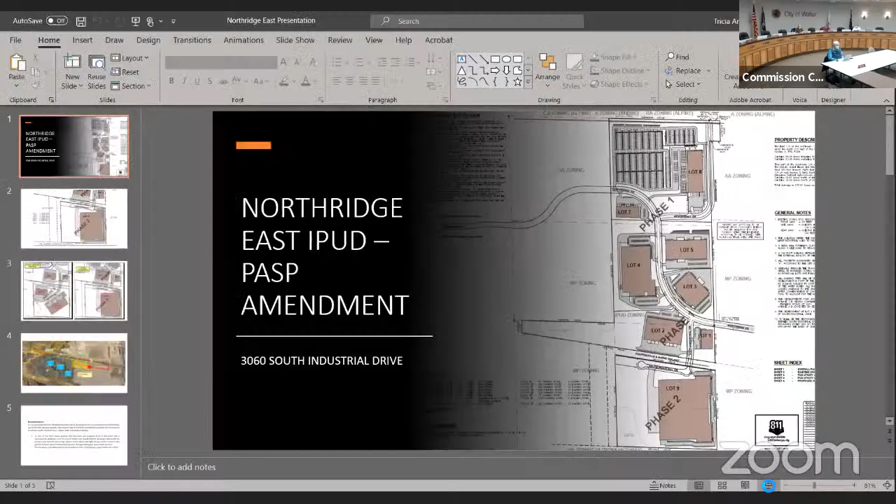So in this graphic here, you can see the whole PUD, and phase 2, as you'll see, is below or south of the railroad tracks.

So another thing they are proposing, on top of combining lots 9 and 10 for one large development, is that they've had interest from a single party who wants all of that acreage for a significant industrial development. Because there's only one occupant proposed for this acreage, it didn't make a ton of sense for them to extend the road all the way to the westernmost border of the parcel.

Because of that, for the time being, staff is in support of building this road in the way that it's been shown. They have to cross the railroad tracks, and there's a bit of work needed with the Coopersville Marne Railway to comply with their standards and MDOT rail safety.

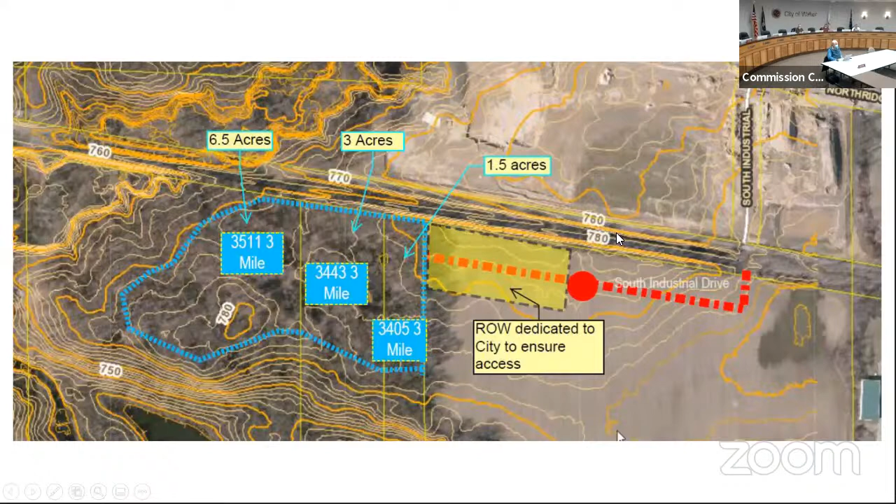I don't want to say this isn't the most desirable approach with a 90-degree bend, but when you look at the development of the site, I think what the city's looking for here, we can find a way to work around that with some safety precautions in terms of clear vision, extra signage, and things like that. So that's really the box check for me tonight, that that's feasible. We think we can work through that.

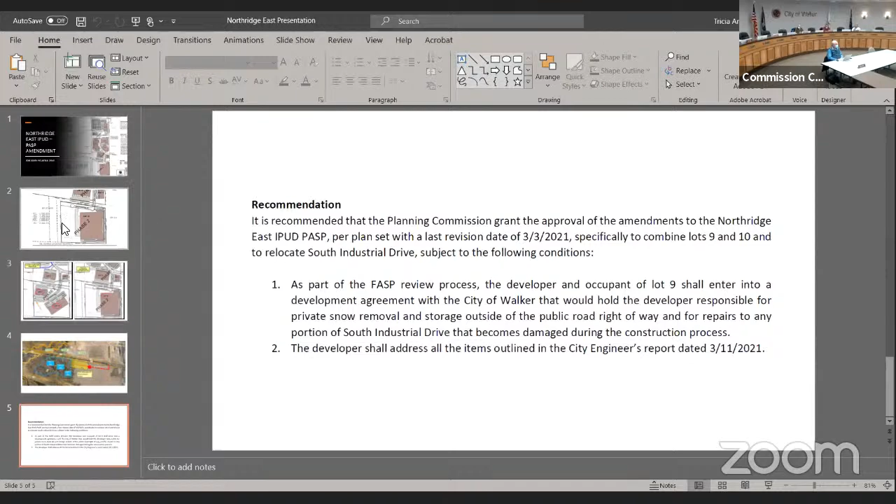We will be working with Tom a little bit as he's working with the railroad, so we'll have a little conflict there, but we'll figure our way through that.

Sanitary sewer and water main: the site south of the tracks will still be served by public sewer and water. There may be a need for that sewer and water to extend all the way to the west property line. We're still working through that with Grand Rapids, but typically they'd want it fully developed when that happens. I think the developer is aware of that, but we have to work through that process.

That's really it, other than one comment: as we try to work with folks and help accelerate some of these projects, we're encouraging them to turn in the detailed road utility plans early on so that we can maybe do some of these things concurrently. If we can get through the reviews and permitting for the road, they can get started a little early and put themselves at an advantage when it comes time to start putting in foundations, walls, and trusses on the building.

We want to do everything we can to minimize the friction between those two sources, so that if a guy's coming in with a load of steel trusses, for example, they're not driving over an under drain or a water main that was just built and doesn't have the necessary cover. So whatever we can do to move this road part along quicker, we want to try and do that.

Okay, thank you, Scott. Any questions for the city engineer?

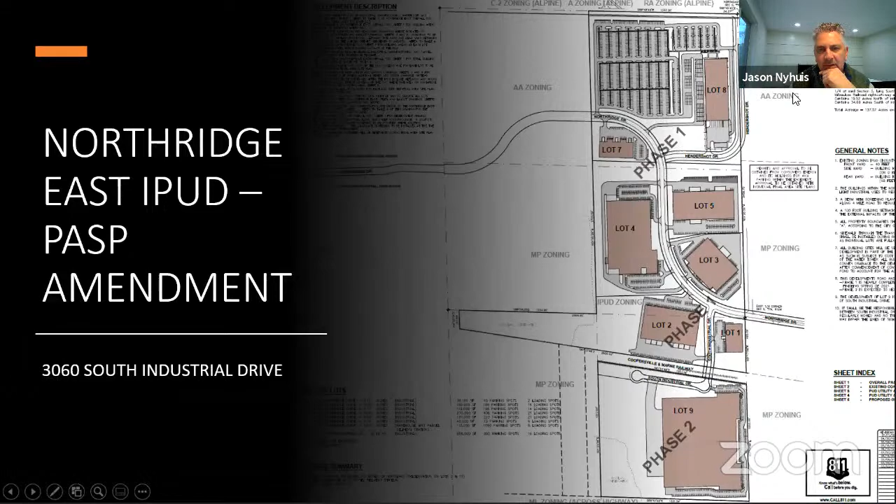Those were both kind of towards Scott. In terms of the dead end, that's probably a reasonable length, especially knowing there are properties to the west that could be served in the future, because we don't want them landlocked. In terms of extending the road to the west property line, I think Frank has some ideas on how to craft that into the development agreement. So we're kind of hands off a little bit on that, since that's something he'll work out with Visser Brothers.

Any other questions? Before we open this up for a public hearing, I'd like to have the developer come forward and offer any comments you may wish to share.

Good evening, I'm Greg Ball with Visser Development. As usual, staff has done a great job explaining what we're trying to accomplish here. When we lay these PUDs out at the very start, we do our best to crystal ball what we think will happen based on our experience in this development field. Ultimately, we have some changes, just like we did with the Amazon site. This too is a little bit of a change, but we were fortunate enough to meet Speedrack Products, the company we're working with. I'll introduce Eric Quist, the president, in a minute.

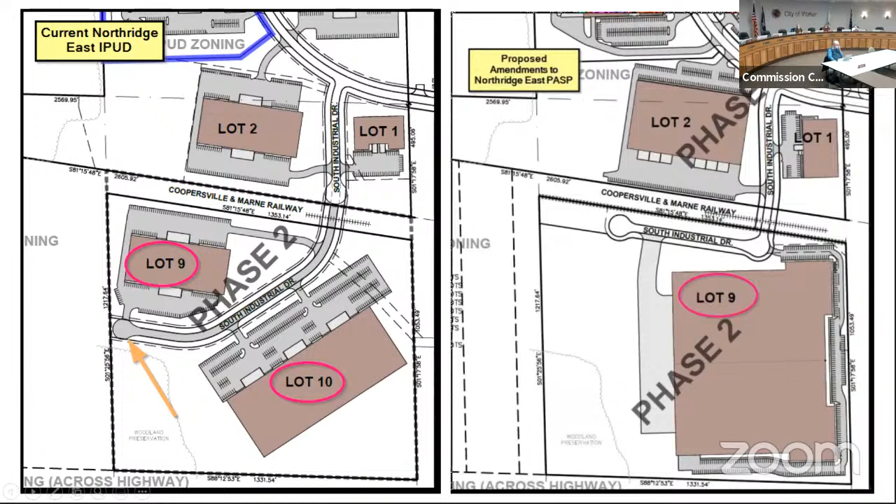So, you know, we're really happy. Thank you for having me on. We're really happy to be here.

We were targeting Northeast Indiana at first, but we decided this is really where we wanted to be. We feel that we can get the workforce we need here, with our owners in the Grand Rapids area, as well as our corporate offices in Sparta. I think most of that is going to move over here. We're still going to have some offices in Sparta, but we are going to put offices in with this facility. Right now we're planning just shy of 300,000 square feet with office and manufacturing.

It'll be high-paying union jobs, hopefully, because it's a right-to-work state. Our current facilities are under contract with the unions - the Millwright unions out of Warren, Michigan. They have a training facility down in Wayland off 131, and that's who will help us recruit people, including robotics people and welding people, and train them and bring them in.

For us, time is of the essence because we already have orders on the books for both Ford and Amazon for 2021 and 2022. So the first phase is to get through about 300,000 square feet, and by 2023, hopefully be breaking ground on another 300,000 square feet for phase 2.

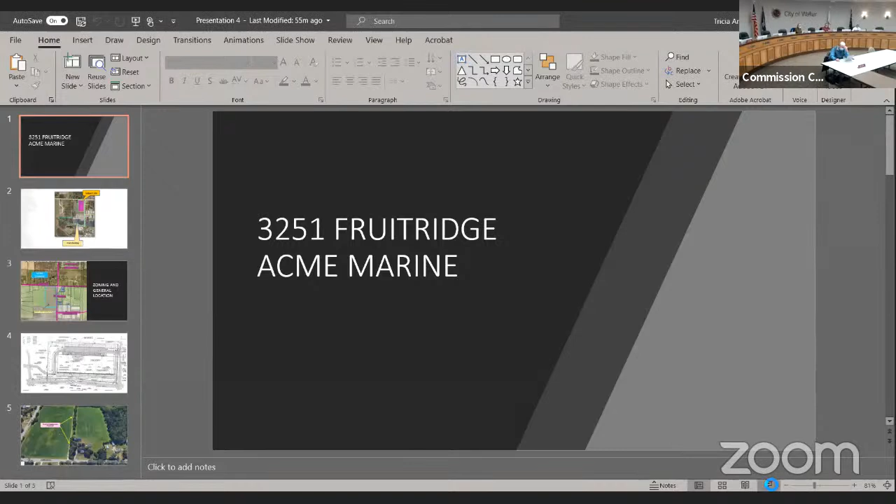Okay, so this project is for a 285,000 square foot multi-tenant industrial building and related site improvements. The planning commission is being asked to grant approval with conditions, or tabling of the request. This is a site plan review located at 3251 Fruitridge Avenue, and this piece of property that is the subject tonight has a future address of 3501 Fruitridge Avenue.

The lot size of the piece that will be split from the parent parcel is 17.65 acres. It has a zoning of light industrial, and the future land use is business and enterprise in the northwest neighborhood cluster. This project is located on the southwest corner of 4 Mile Road and Fruitridge Avenue, just north of the Irwin Seating site. Tonight we have Justin Longstreth of Bruggink, representing the applicant, Honeycrisp Ventures, and the owner, Graham Irwin.

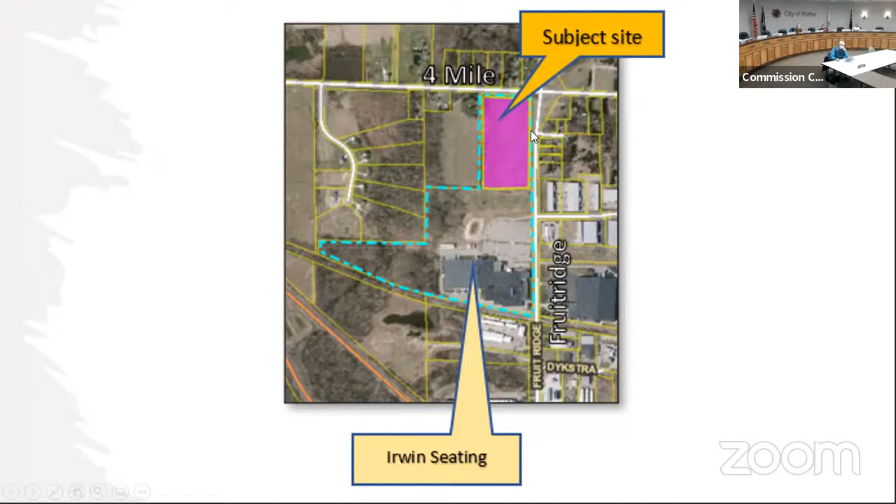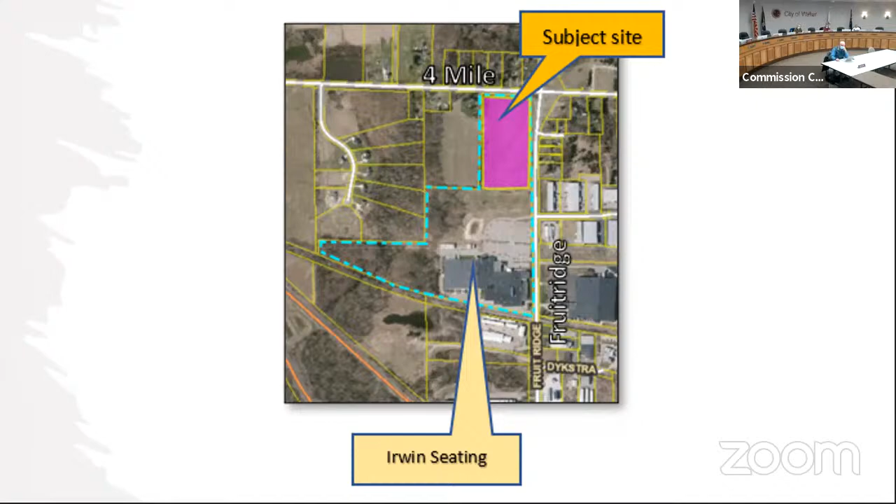This map shows the portion of the Irwin Seating site, with the blue dashed line marking the entire site. Just this portion is being proposed for site plan approval for the industrial building. We held a site plan review committee meeting with the folks from Acme Marine, who will be the first occupant in this multi-tenant building, and with Justin. The revised plans they provided before going to the planning commission addressed most of our concerns. We just have a couple of issues we want to still see if we can get worked out.

They are bordering an agricultural parcel, and we have agriculturally-residentially zoned property in Alpine Township on the north side of 4 Mile Road. We also have some residential land uses on the east side of Fruitridge Avenue. So some of the things we would like them to pay closer attention to are the lighting and the landscaping.

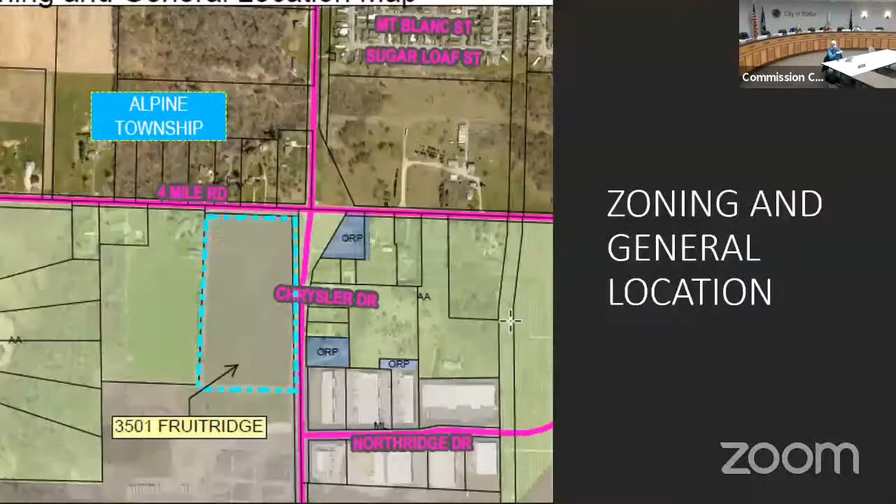I'll show that picture. Justin can probably speak to how much of this is on the subject parcel and how much is hopefully on the neighboring parcel, but this seems to be a good buffer that if it could stay, the number of plantings that would have to go in on this side could easily be reduced.

There's a bit of a berm here, so we lose some elevation right here, and I think originally they planned on adding a whole bunch of boulders and some really nice expensive stuff. So if any of that changes, we're asking that they work with staff to submit an acceptable landscaping plan that meets the needs for this site.

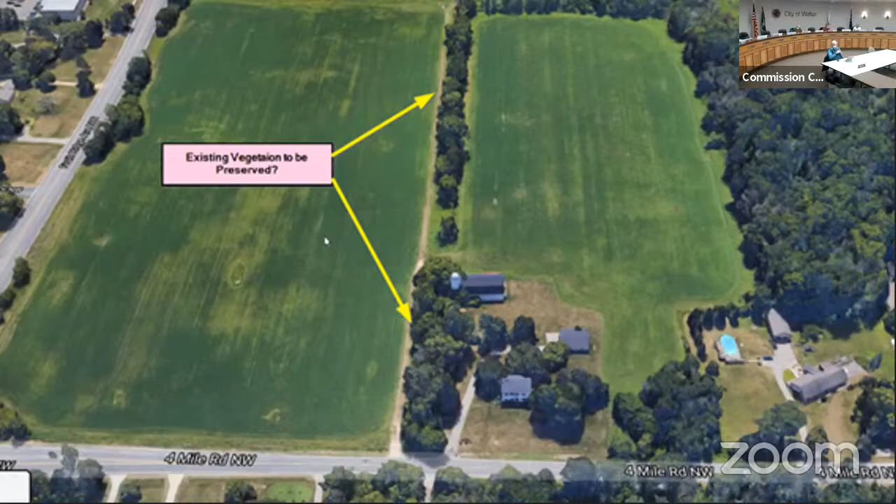And then the last piece that I have is I'll just go through the recommendations. It is recommended that the Planning Commission grant site plan approval for the 285,000 square foot multi-tenant industrial building for Acme Marine at the future address of 3501 Fruitridge Avenue Northwest, per the plan set with the last revision date of March 3rd, 2021, subject to the following conditions.

The developer shall address the items outlined in the city engineer's report dated 3/11/2021, which he'll go through in just a second. The applicant shall revise the landscaping plan to include planting calculations for review and approval by staff prior to the issuance of a building permit.

The applicant shall revise the photometric plan to reduce the light levels within the 20-foot buffer zone along the western property line to 0-foot candles prior to the issuance of a building permit. The applicant shall provide a recorded copy of the 40-foot wide access easement for ingress/egress prior to the issuance of occupancy.

One last issue: they are proposing 139 parking spaces where 148 parking spaces is required, but they do have 24 future parking spaces. So if the planning commission decides that the proposed parking is acceptable for the one occupant that will be in the building before the rest gets built out, then they can modify that condition.

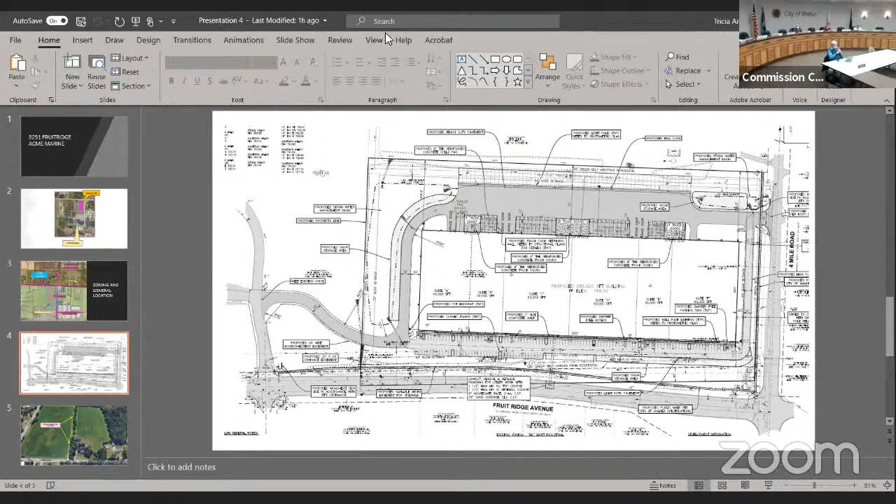All right, seeing none, we'll turn this over to the engineer, Scott Connors.

Being that this is a site plan review, you guys only get one shot at this, so my comments are a little bit more detailed. I'll try to go over them quick, but bear with me. We are going to need a little bit more information on the existing storm sewer in the street at the southeast corner that drains through this site, so we want to make sure all the sizes are appropriate and the design is worthy there.

The sidewalk should be located so the back of the walk is 49 feet from the center line of the road. You'll notice there's some really goofy right of way out here that doesn't look consistent—the road kind of curves to the east. I think when that was lined up decades ago, the right of way was never really cleaned up, and that's okay, but we don't want to penalize them by pushing that sidewalk too far back. So we're letting them wrap the sidewalk with the road to get that 49 feet, which mimics our commercial industrial road standard. The way they've got it shown now gives them about 5 extra feet for a landscaping berm, which I think will make a big difference in making that fit and making those slopes a little bit safer.

The open cut in Fruitridge shown for the water main—we want to make sure there are dimensions on there in advance. If you notice when the DTE site went in on 3 Mile Road, they had some open cuts; you can drive by those now and see that the seam for those open cuts is right in the middle of the lane. That's really what we want to avoid. We want to get those on the lane lines so there's no tire track over them—they last a little bit longer, and that's part of asking for that detailed information on the plans.

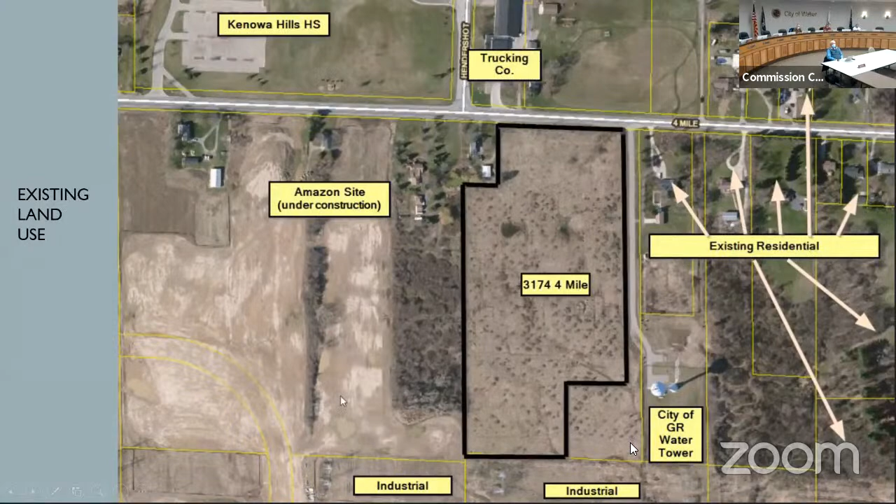So just another overview of the surrounding land uses. Here's the subject site. It's directly east of where the Amazon site, which is under construction, is located. You've got a trucking company here. You've got several existing residential uses here, more residential uses on the north side of 4 Mile, Kenowa Hills High School up here. Then we have this water tower property. Then we have some industrial down on the southern border of the parcel.

So at the last meeting, we talked about needing more information with traffic circulation, and we had asked the applicant to please provide truck turning templates. Those were provided, but it did not show a 360-degree maneuvering around the entire building like we had asked for. So that's one of the things that we're looking at tonight.

I think it's manageable. Scott noted that the truck turning movements that were provided to us have to use the right of way in order to be able to maneuver into some of those truck docks. So we'd like to be able to work with the applicant to see if we can't figure out how to get trucks in and out without having to utilize the right of way to do that.

As far as, I'll get to landscaping and screening in a second, but first I'd like to talk about land uses. And so we talked about land uses that should be prohibited at the last meeting, and that the Planning Commission has the discretion to prohibit any specific land uses. In this particular case, you have some existing residential sort of all throughout the east side of the parcel and some on the north.

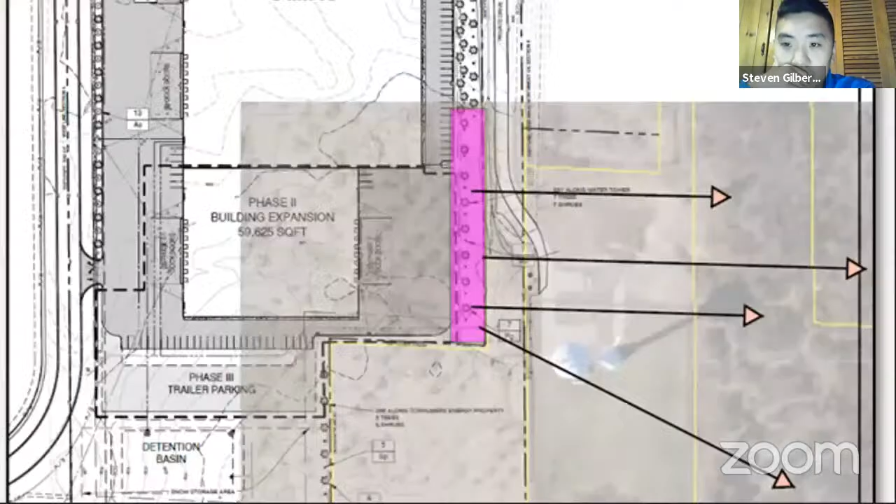And so the next item that I want to expand on a little bit is the landscape buffer. In the first plan, it showed a berm. So the question was, where are the details for this berm? Because they were referenced on the grading plan, but the grading plan didn't have any details. And so the revised plan showed the berm being taken out altogether.

It's my recommendation that we keep a berm there to add buffer from any sounds, any noises, the view of the building. When you add landscaping to the top of the berm, it would provide a much better buffer than just the landscape plantings. And so the developer or the applicant also revised the plan to sort of beef up the number of plantings on the west side, which is great.

I think the rationale was that there's no actual residential uses over here, no houses, nobody utilizing this property that's really going to care if they look at a building or a truck loading dock or hear any trucks.

But there's quite a bit of acreage over here, and with the market being this hot and the inventory of residential single family homes being really low, there's potential for development here. So just because there's no residential land uses there now doesn't mean there won't be ever. It's important during the PASP step of the process to nail down our expectations for buffering and screening between incompatible or potentially incompatible land uses.

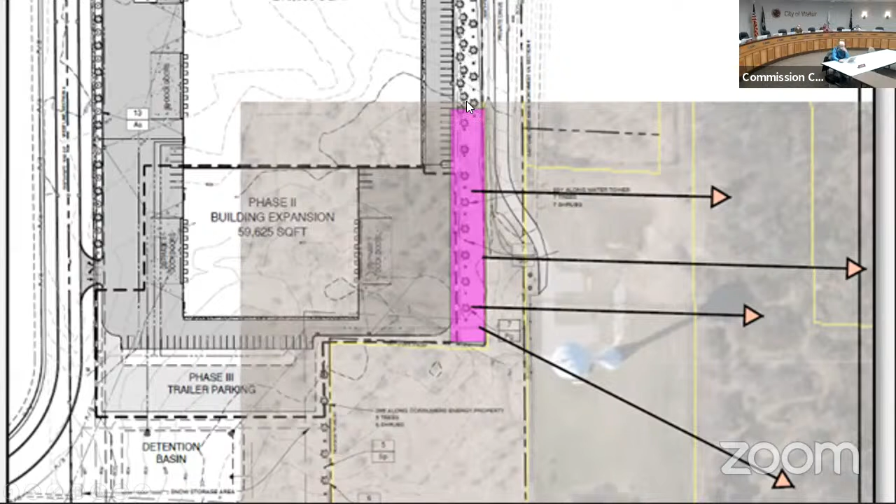One of the other things we've asked for, so we can get a better idea of what this profile looks like from where this guy is pulling into his driveway, what's the elevation here compared to the elevation here and here, and where the building is going to be placed. That's important when you have industrial abutting residential. Yes, we have a little bit of a buffer here from this water tower driveway, but there's nothing in there that's going to stop any sound or sight from the building that is proposed here.

So I've asked for a buffer profile. I had to hand draw a picture. I hope you guys appreciate that, because I couldn't find the perfect one. So I'm not very good at drawing cars, but I'm not an architect.

So this is what we're looking for. We want to see a two-dimensional side profile showing the elevations of where the existing residential is, elevation of a proposed berm with plantings. What is this area profile going to look like?

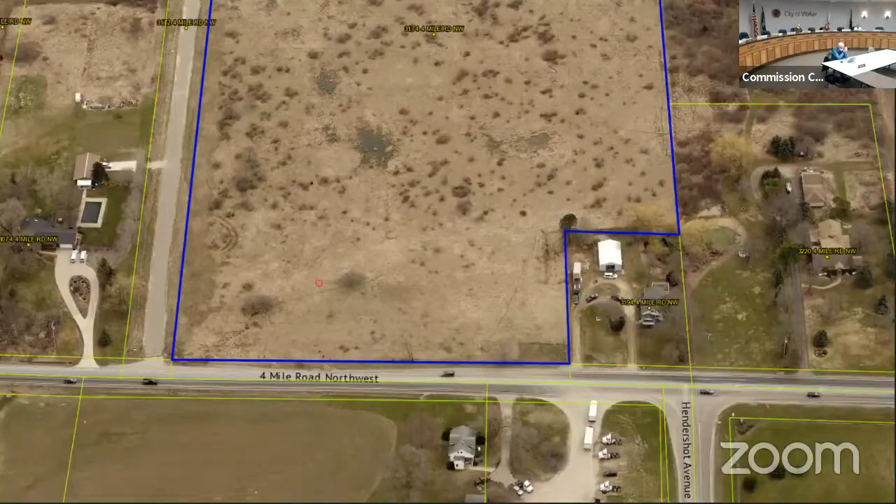I think these items are manageable at this point versus at the last meeting that we had these guys here.

This time around, I'm going to be asking that the planning commission decide whether or not they feel comfortable with staff handling revised landscaping plans, and not necessarily just the landscaping plan, but the buffer itself. What is that buffer going to look like? If the planning commission is comfortable with staff reviewing and approving that piece, that could be a condition of approval of the PASP.

If the planning commission is not comfortable and would like to better understand what this buffer and profile is going to look like, I've also suggested the option of the planning commission approving the PASP subject to planning commission review of a revised landscape plan that shows the buffer. Or they also have the choice to table any action. I'm not necessarily recommending that the planning commission table tonight's item, but that option is always out there.

So if the planning commission decides not to table and wants to choose one of A or B in terms of approving the PASP subject to further review of the landscape plan, either by staff or the planning commission, I'm recommending that it also be subject to the following conditions.

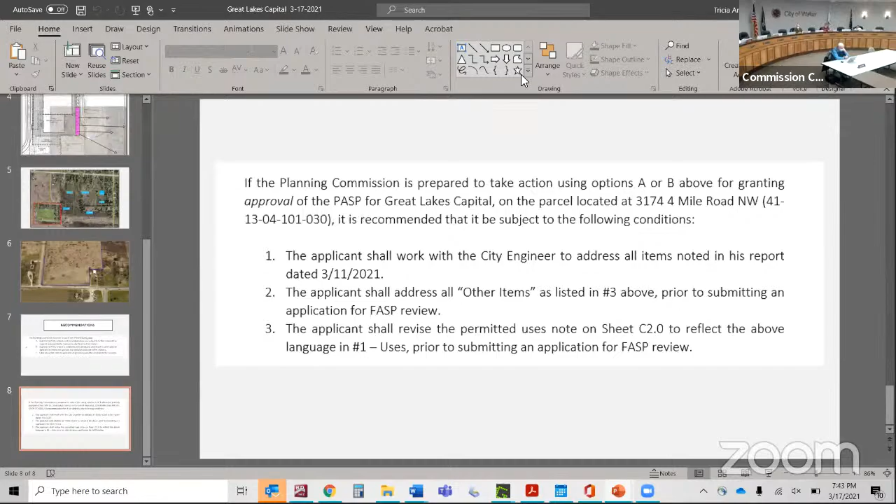And that's all I have. All right, thank you, Tricia. Commissioners, any comments or questions for Tricia at this point?